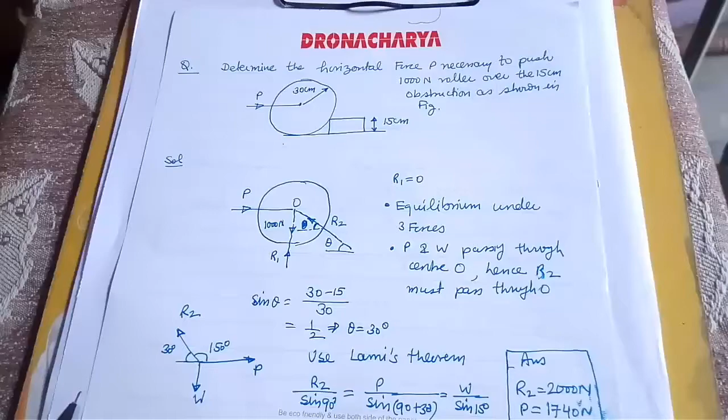Let us take up some problems of equilibrium of spherical bodies like wheels or cylinders.

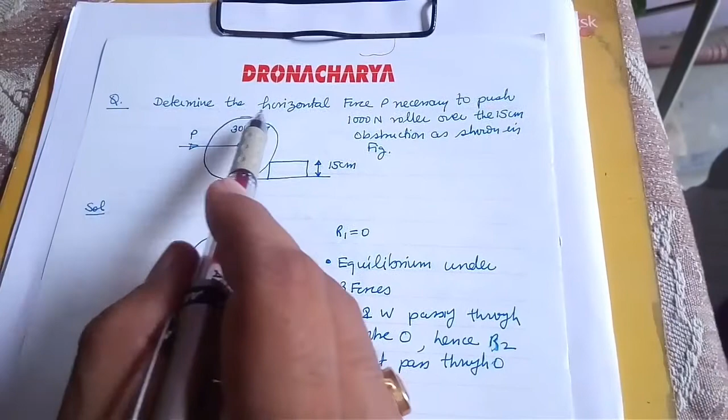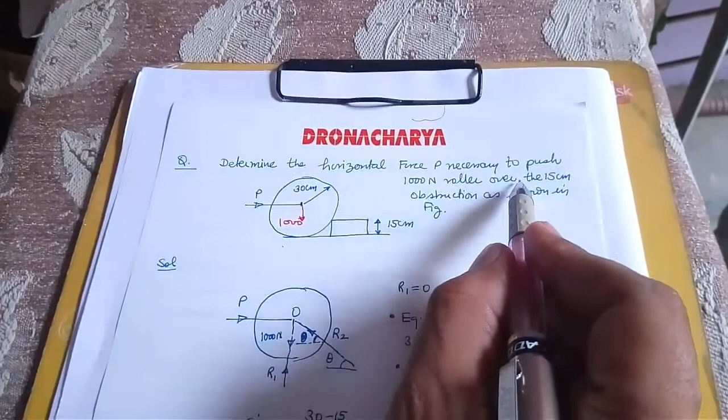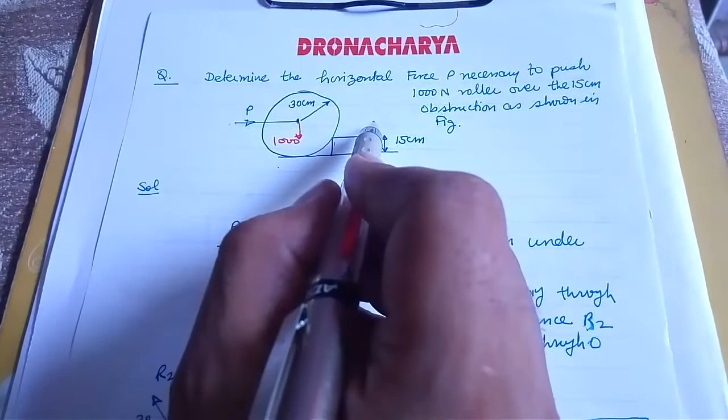The question is, determine the horizontal force P necessary to push a 1000 Newton roller over a 15 centimeter obstruction as shown in the figure. There is an obstruction and this is a wheel. We wish to find a force so that we can push it over this. Now let us make the free body diagram of it. The radius of the wheel is given as 30 centimeter and this obstruction is 15 centimeter.

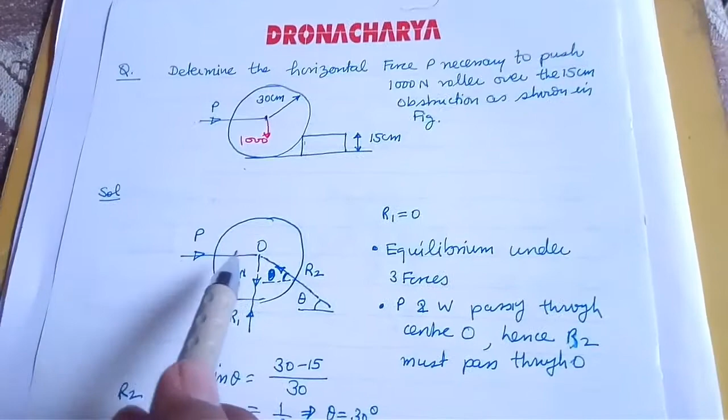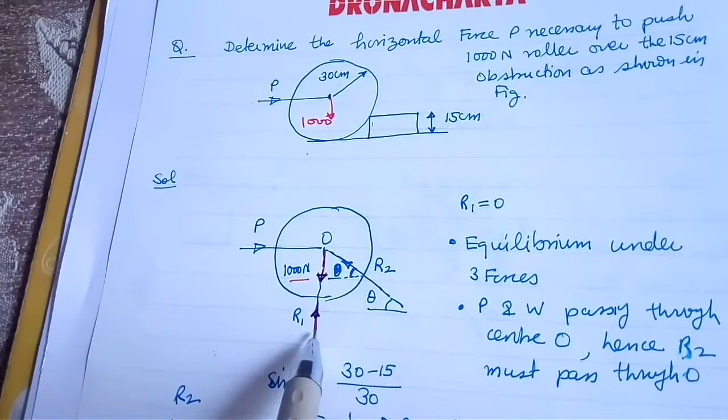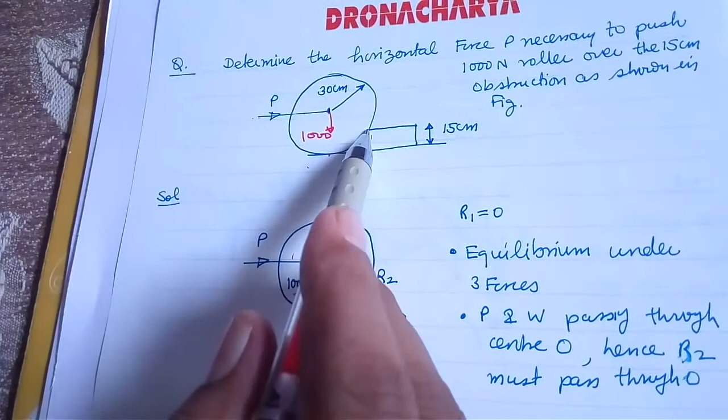If we make the free body diagram, one force is the weight acting downward like this, reaction from here is going to act like this, and interestingly when this is going to move, R1 is going to be zero at the time it loses support contact from here. That means the contact will be only here, so it will lose contact from there. R1 is going to become zero. This is required to be understood.

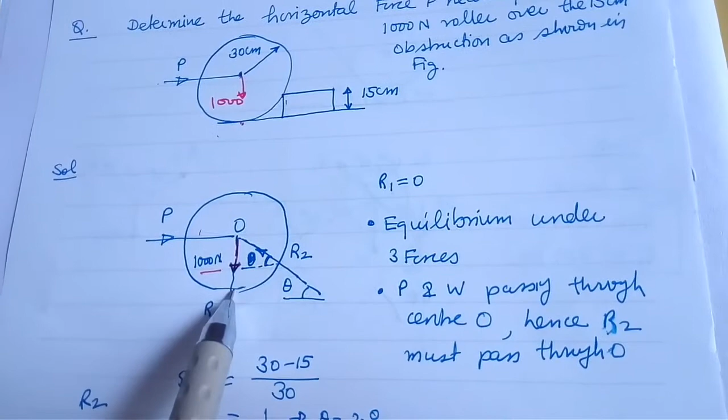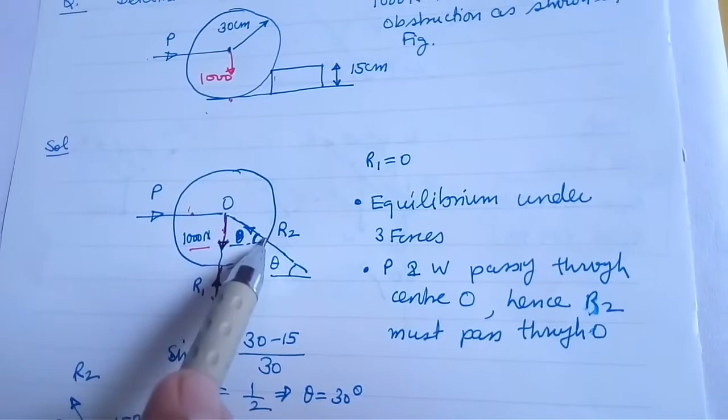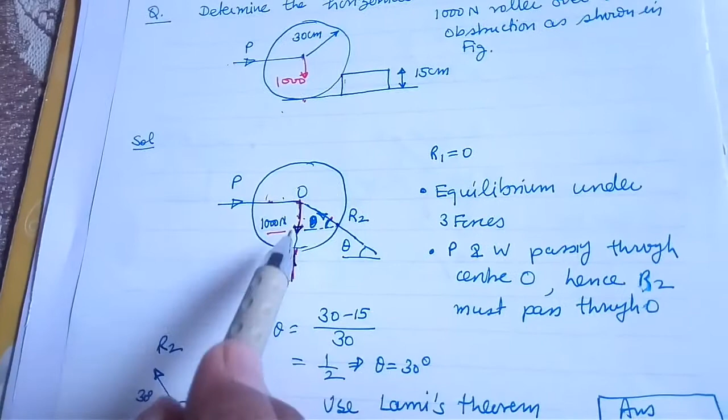Now it is equilibrium under three forces. One is this, and the third one is this. Now we should also understand one more important concept here. If there is equilibrium under three forces, 1, 2 and 3, then equilibrium is possible only if two of them are passing through a point, like P is coming from here and weight is acting here. So if two are acting at a point, then it is necessary that the third should also pass through this point, otherwise equilibrium will not be possible.

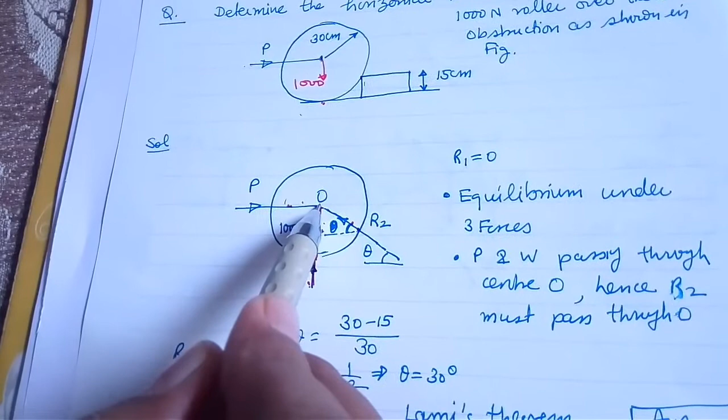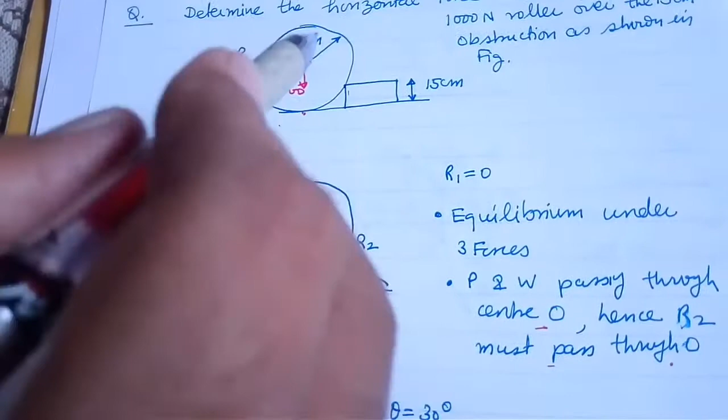So equilibrium under three forces is there. If two are passing from one point, then the third must pass through the same point. This will basically give us the direction that the reaction acting here should pass through the center. That is, we have shown it here.

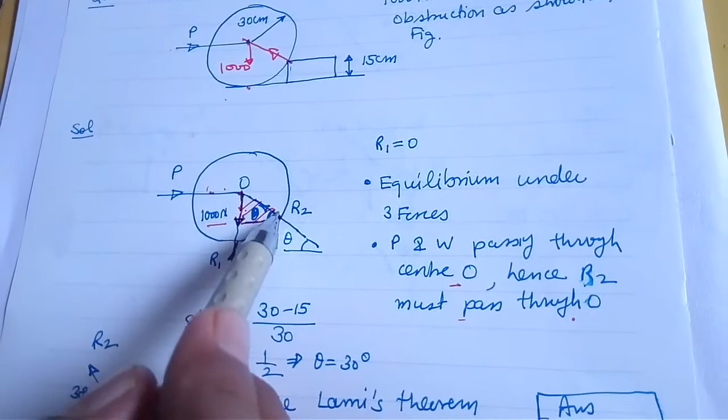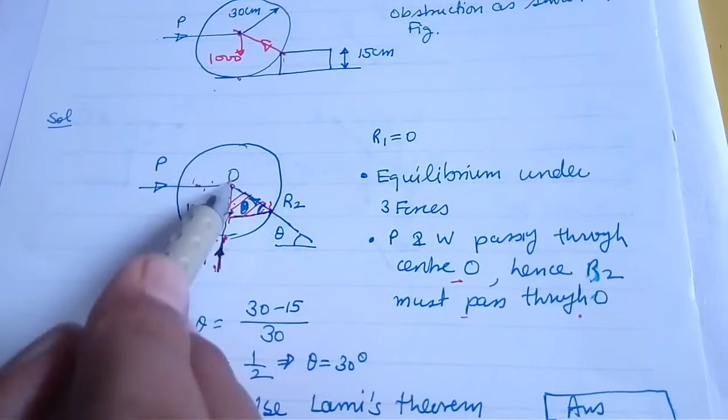Now we can use this triangle to determine the value of theta. The value of theta can be determined by this upon this, because here to here it is 30 and here to here it is 15. So this is 30 minus 15. So sin theta is 30 minus 15 by 30, which is 1 by 2, that is 30 degrees. So we'll have now only three forces acting.

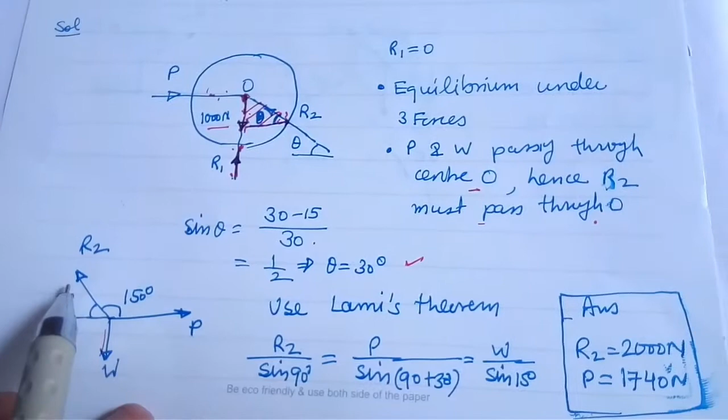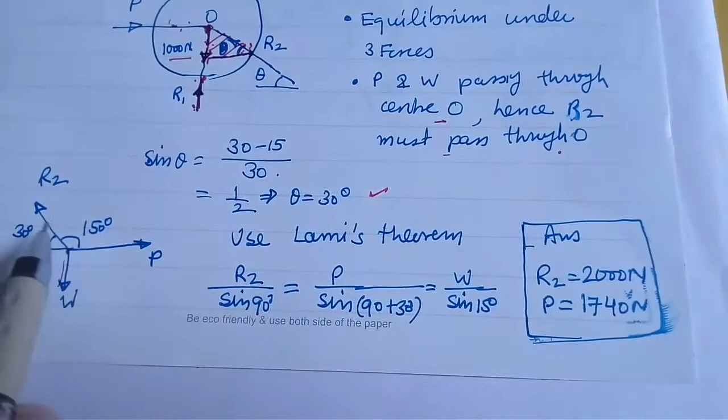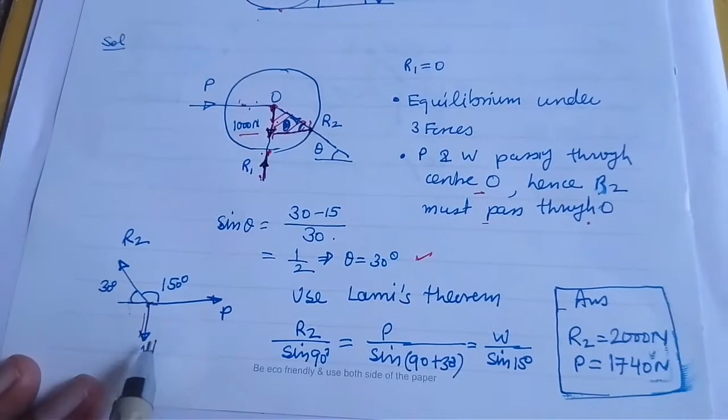One is P, one is W, one is R. If we transfer the angles, this is going to be this kind of situation. We can use equations of equilibrium, or a simpler way we can use Lami's theorem, because it is a concurrent force system under three forces of application. So using Lami's theorem, we can pick up the value of force, with corresponding angles. So P upon sine this, W upon sine this, R2 upon sine this, we can use it to determine the value of R2 and P.

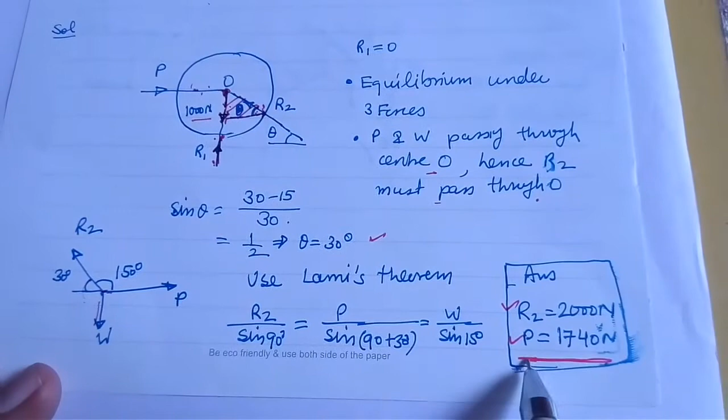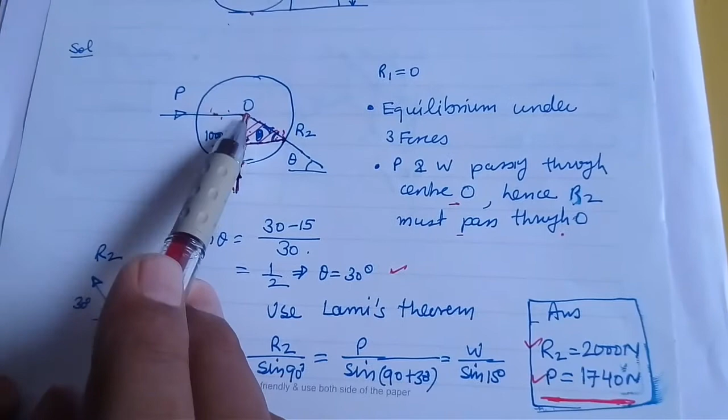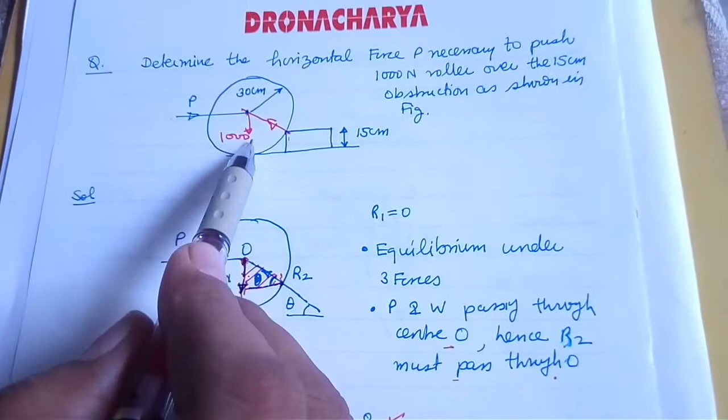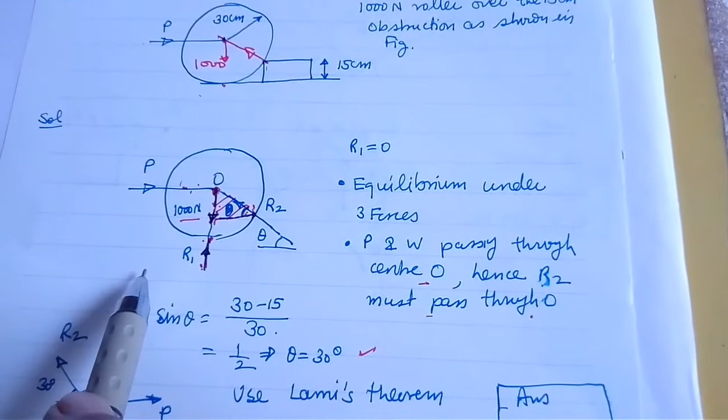It is required to calculate the value of P, and we can directly get it from here by using Lami's theorem. So it is important to understand again that if there is equilibrium under three forces and two of them are collinear or concurrent, then the third should also not be collinear - if two of them are concurrent, the third must also pass through the same common point. So if one is passing from here, one is passing through here, then the third must pass through here. This is an important concept we should always implement for equilibrium of forces under three forces. Let us take another problem.

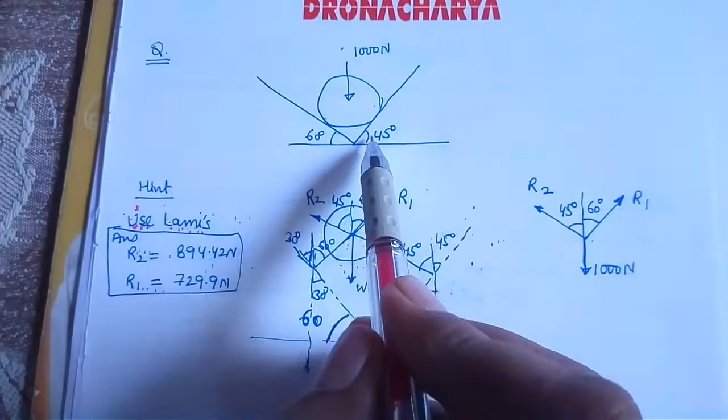There is a cylinder or spherical object. It is against two inclined planes. One is at 45 degrees, another one is at 60 degrees. Now it is again going to become an equilibrium problem. Let us understand how it will come into the picture.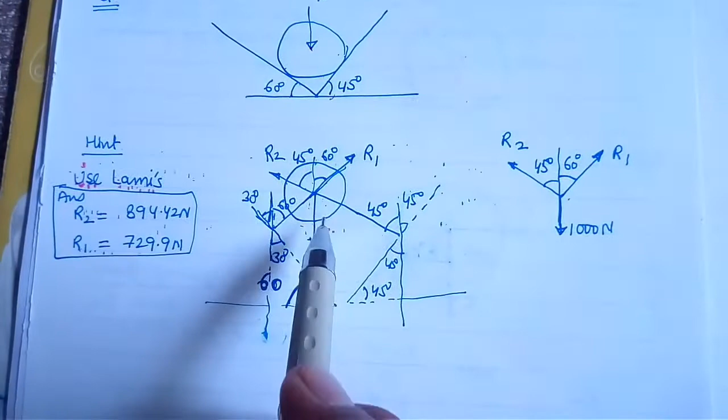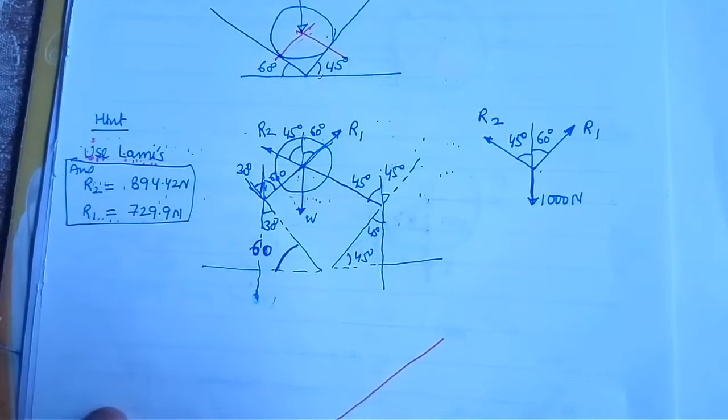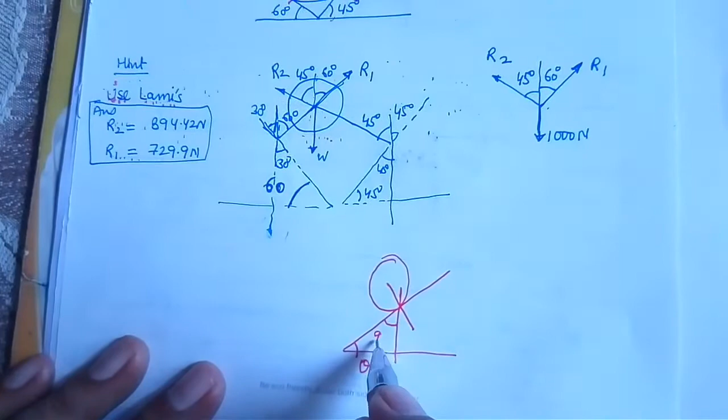So weight is acting here. One reaction will be coming from here and one reaction will be coming from here, the contact point. Now we have to understand how reaction comes if there's a sphere on an inclined plane. Reaction will be from the contact point towards the center. If this angle is theta, then this angle is theta. This is 90 minus theta. This will become theta, that means this angle will become theta.

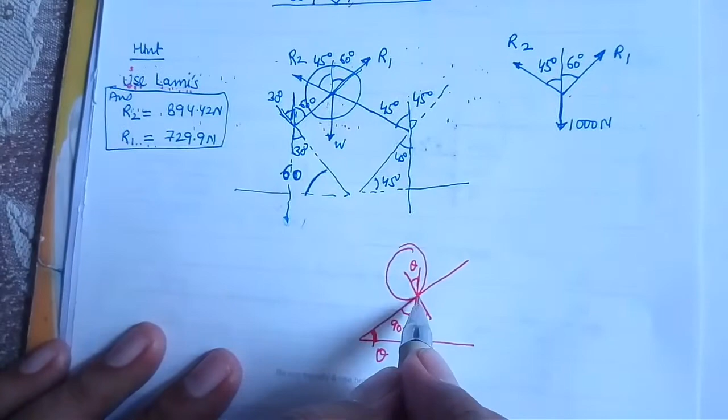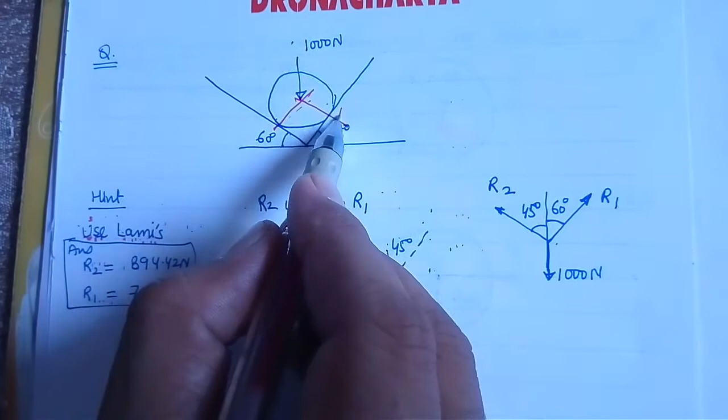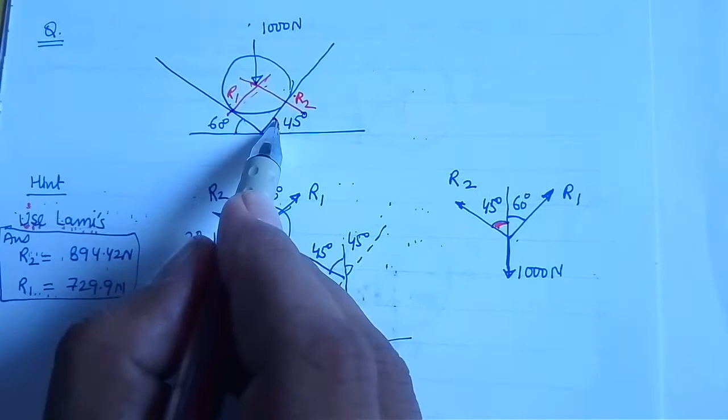That means whatsoever was the angle of inclination with the horizontal, the same will be the angle of reaction from the vertical. This concept can be used simply to determine the direction of reactions. So reaction because of this plane, let us say R2, and reaction because of this one, let us say R1. R2 will make an angle of 45 with the vertical, which the plane makes from the horizontal, and R1 will make an angle of 60 with the vertical, what the plane makes with the horizontal.

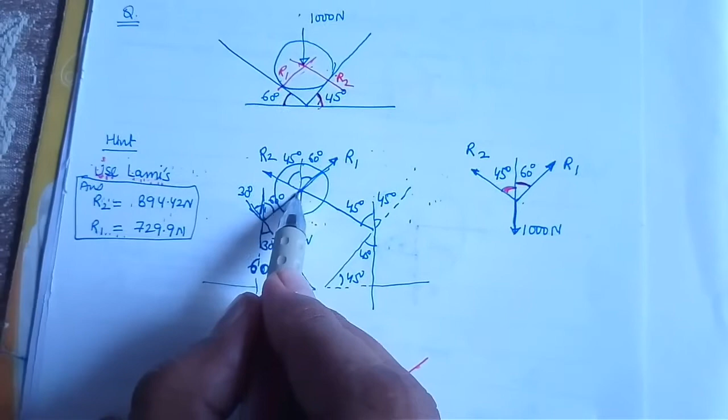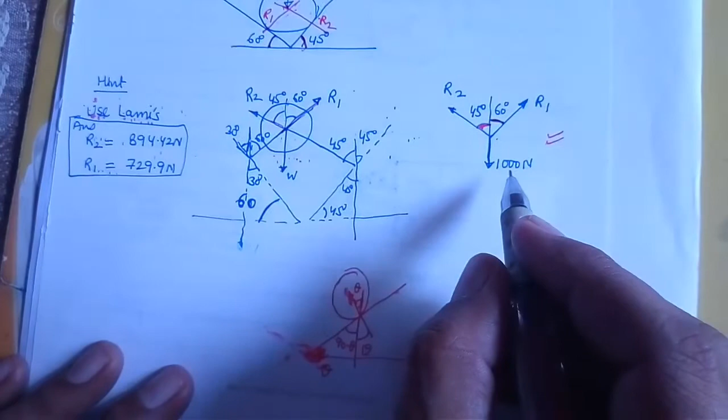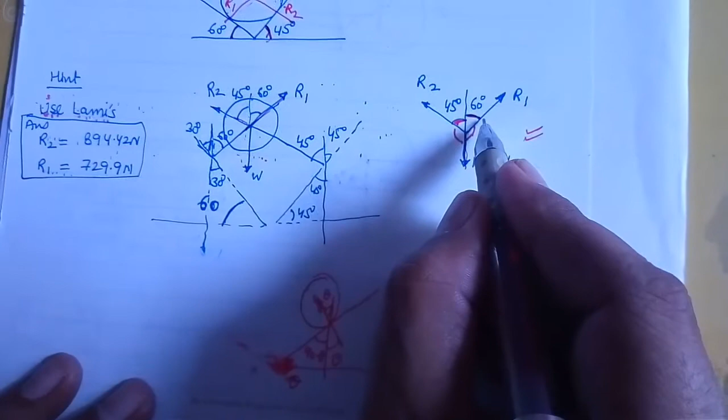So ultimately the free body diagram I have shown it here. R1 is like this, R2 is like this, and W is like this. So it is again becoming a concurrent force system problem under three forces. We can simply use Lami's theorem to determine the value of R1 and R2. It's very simple, we can say R1 upon this angle is equal to R2 upon this angle is equal to W upon this angle. So all these angles are known to us. We can use Lami's theorem directly to solve this question to determine R2 and R1.

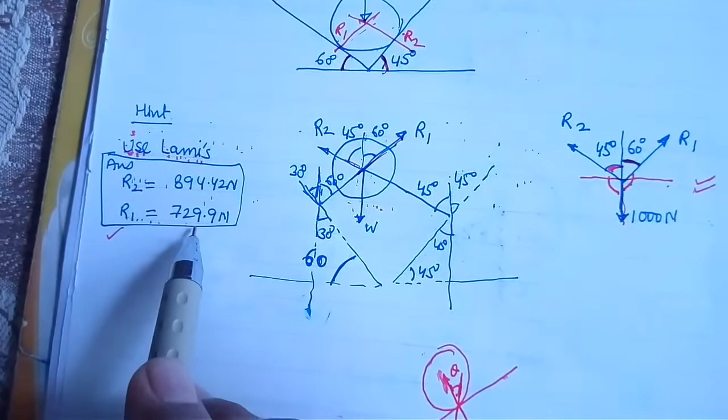R2 value is going to be 894.4 newtons and R1 value is going to be 729.9 newtons.